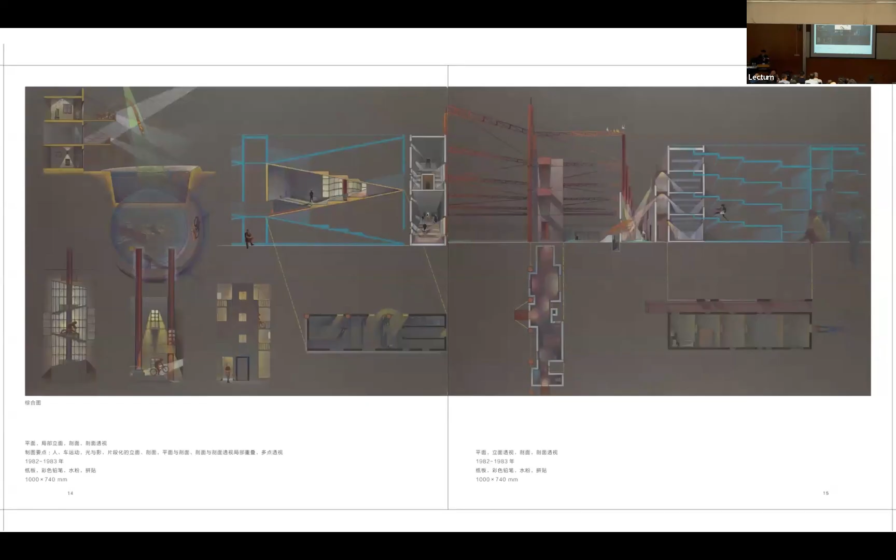As with a lot of projects we do as students—in my case, when I had this commission to renovate a passageway in an office building in Beijing, I thought of putting bicycle wheels onto the bookshelves, since that passageway was used for parking bicycles at the time.

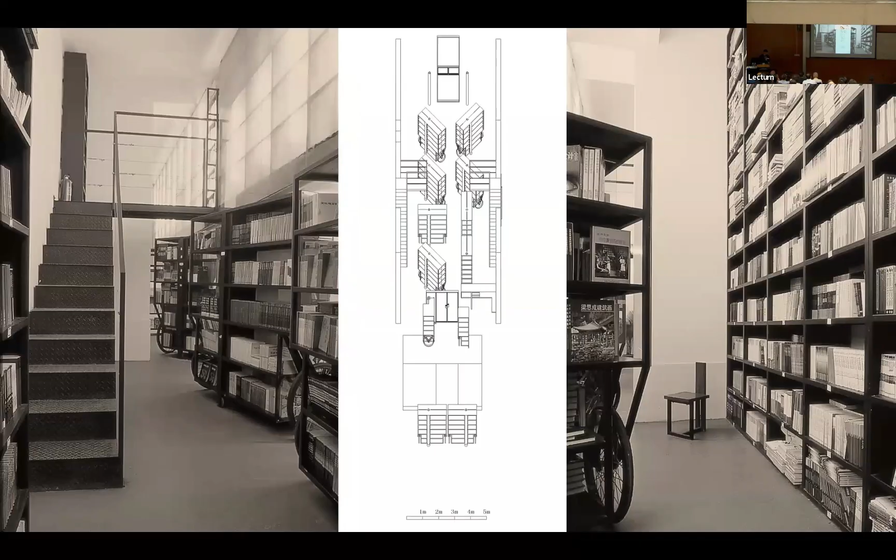So as you can see, all the book bikes—that was the name I gave to these wheeled bookshelves—started to have a certain kind of mobility. It doesn't go anywhere, of course, but it would turn, would revolve. I think what I learned at the time is that an idea can't just be something put into words, but should be something always present so that people would understand why you do certain things. Anyway, that was the first project.

However, with this concept of bicycle, there's already the spatial issue always present in any piece of architecture, and then construction and detail—although the bicycle wheels were bought off shelves, so we didn't have to design the detail much.

From there, I also explored another interest I had, because my background in architecture started with education in second-hand Beaux-Arts in Nanjing, so I carried quite a bit of DNA from classicism as a result, especially perspective.

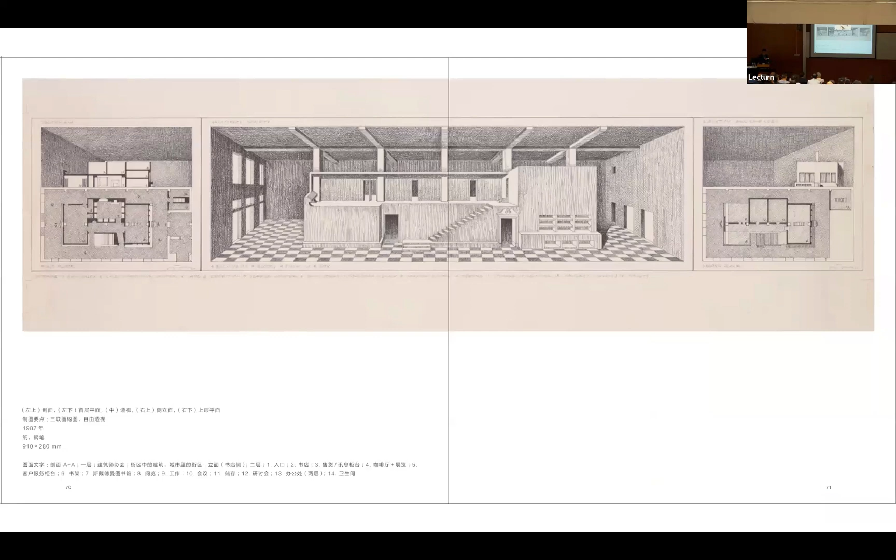So when I did an interior design, I just stretched that piece of furniture architecture into a different kind of furniture architecture. Even the drawing style, I was trying to imitate etching and so on.

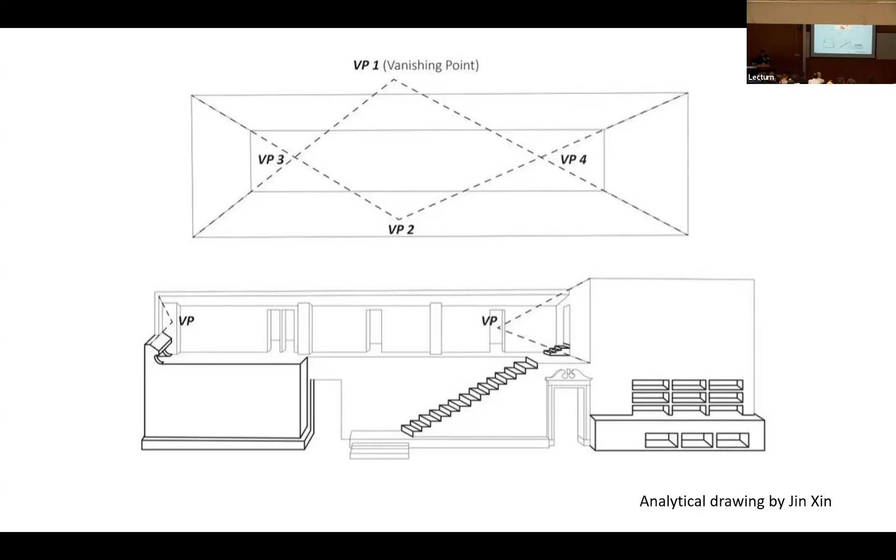Then someone else, a professor at Chongqing University, analyzed my drawing—it wasn't one point perspective after all. I wasn't thinking of just using that; that's not enough, but rather to take the perspective apart, so it becomes a number of different perspectival components put together, including one point perspective as well as axonometric fragments. I actually did more of that.

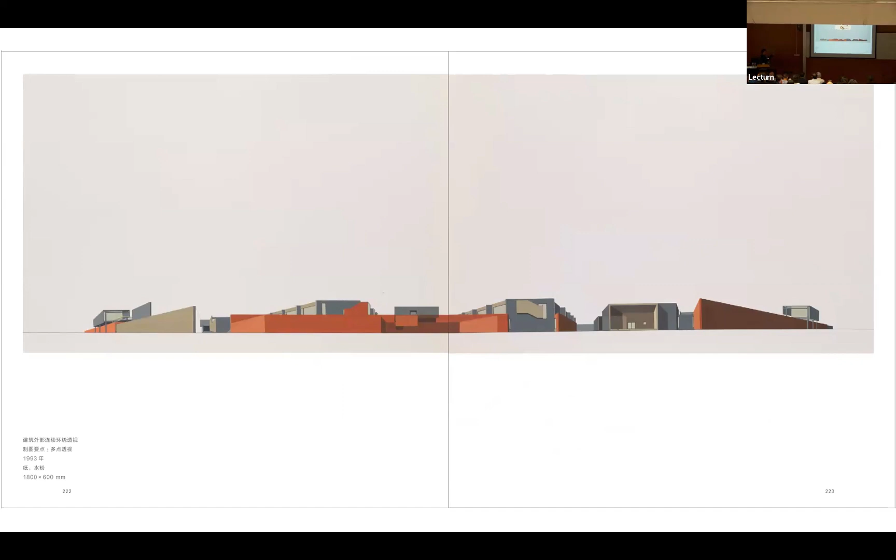In this case, it's only one point perspectives—plural, not singular. This is about going around a kindergarten we were designing, so you end up seeing from one side to the other side, the same building would appear twice.

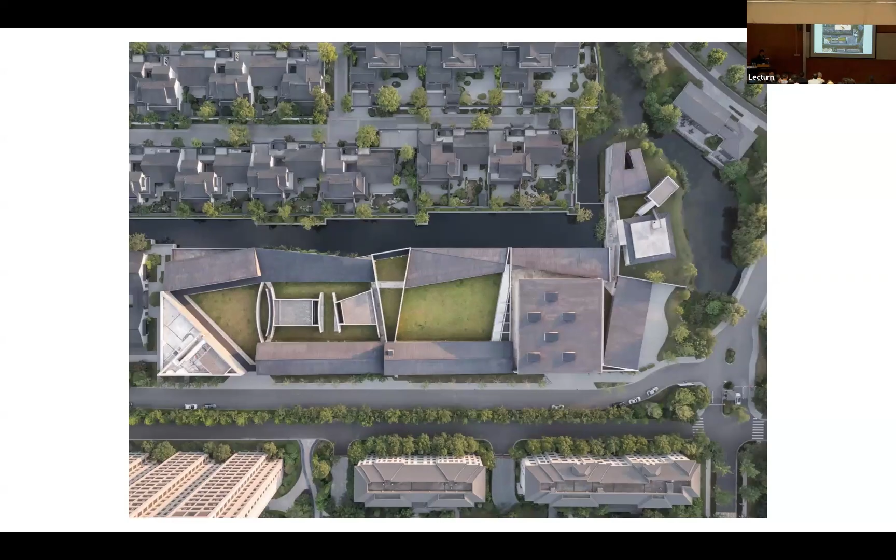In recent years, we had an opportunity to design an art museum for one of the very important abstract painters, Wu Dayu, so we put that early interest to the test. All these diagonal wedges are about playing with one point perspective—from one side, if a perspective is stretched and exaggerated, from the other side it's always shortened and weakened. It's sort of playing with that.

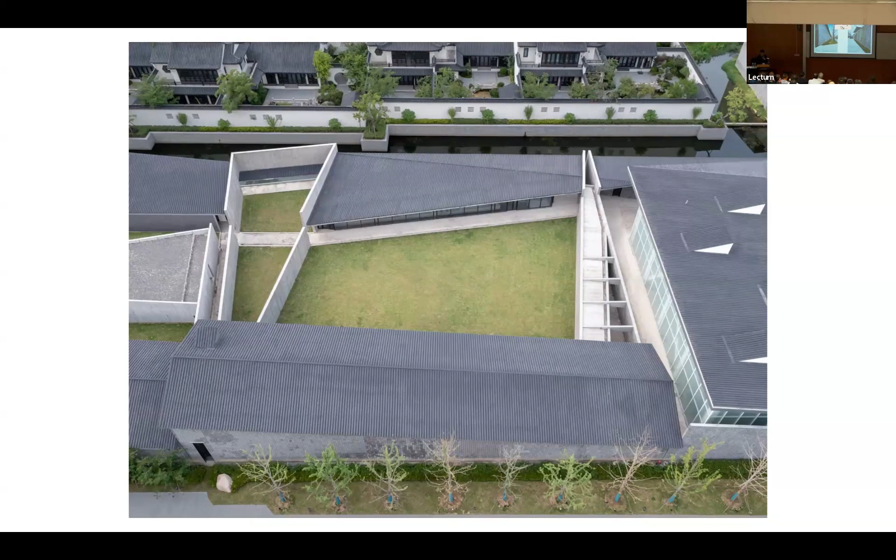When it's built, in some places it worked, but it's very difficult to photograph, so what I'm going to show you may not really give you the sense of it. That wall is tapered all the way, so that on one side it actually appears longer, and on the other side, of course, it's shorter—it's dramatic. If you go, you will see it, but in the picture they look rather similar.

The same thing applies with this space. Anyway, this is just another idea or interest I developed early on. So when I went back to China to practice, I don't think I had any sense of reality, but those semi, quasi—I just heard that word from Kenneth—quasi-academic ideas were with me, in my luggage, so to speak.

And then, of course, space. Even for me, although this is a much later project, it's still built like that. I always remember the nine square grid exercise—I wasn't a student at Cooper, but I just got a dose of John Hejduk regardless.

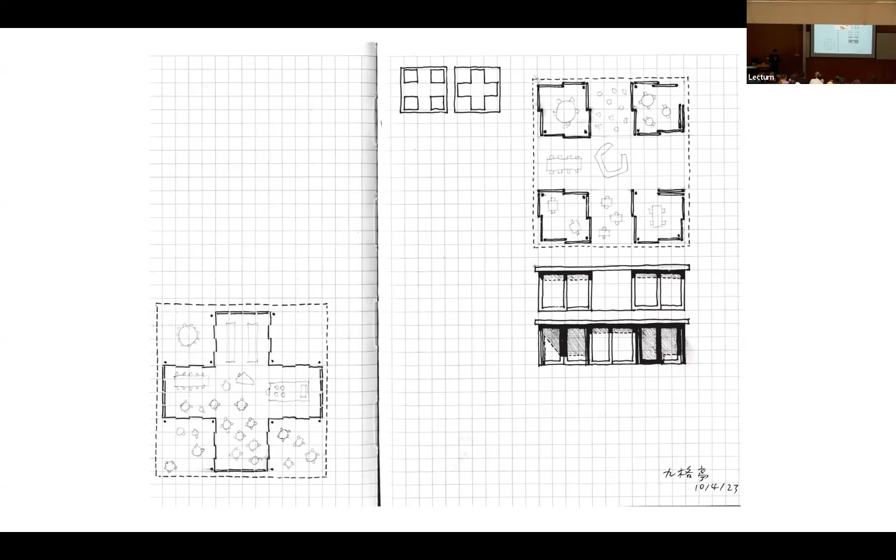So here, this is the interior, right? The cruciform part is interior, but here it becomes four smaller rooms at the corners. So it's a space with changing spaces. Structurally speaking, 12 columns support this big roof, and four corners are cantilevered. So it can go from one formation to another.

And it's on the lakeside in Wuxi. So we want to have the maximum transparency - skinny columns and very thin window frames, trying to get as much transparency as possible so you can see the cantilevered corner.

So this is a later project, also we have already accumulated more experience with structure and material and so on. And of course, the early projects would struggle with these very basic issues.

From that space, during that period, I was able to build something I drew about 30 years ago - I was a paper architect. At that time, I was teaching at Berkeley. I had no clients, no commission, no sites, nothing. But that doesn't forbid me from being in love with architecture. For about 8 years, I was very happy just drawing whatever was in my mind. Later on, I became very anxious about building, but that was a bit later.

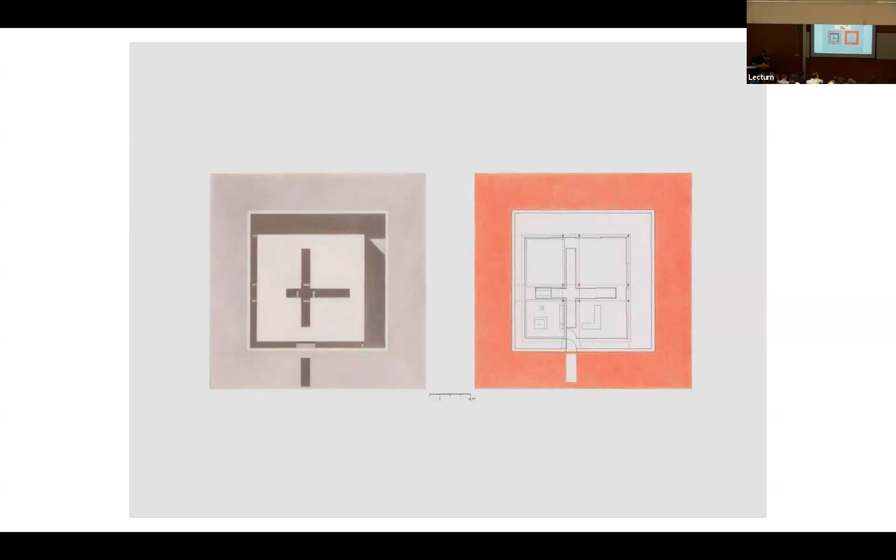So I was thinking of a glass house, one of my favorite subject matters. This is a house with four rooms - bedroom, living, dining, kitchen, and bath. It's a glass house with rooms, because usually a glass house does not have any rooms, which means I needed transparent walls. So this is a double layered glass wall so that I could achieve both a transparent glass house and rooms. That was the revised, improved plan due to more structural reasons.

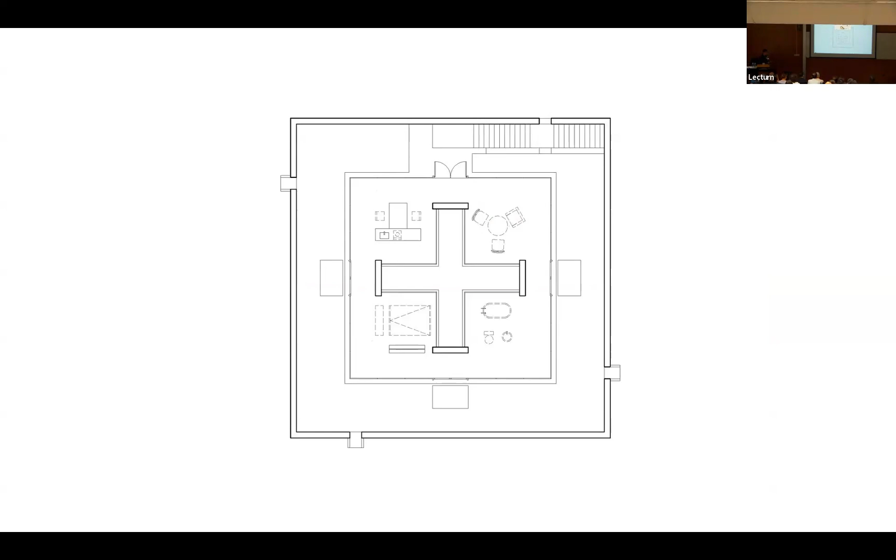So the four load-bearing walls support a cantilever on four sides - kind of a structure. That's the double layered glass wall, or light well. And then inside it's like this.

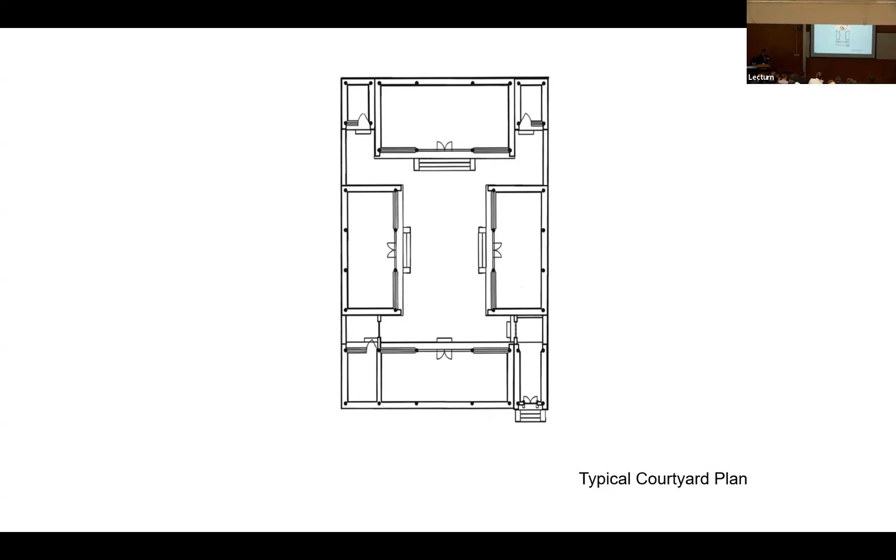So the courtyard project goes on, and this is a much more practical house on a very narrow, small lot in Beijing. We couldn't really make independent rooms on both wings, so we actually made the entire ring around the courtyard the living room. So that's the whole point.

We imagined the lifestyle in this case as how to live around the courtyard, following the sun - starting from that corner, breakfast corner, light is from the east, and then you move to noon time, following the sun to the afternoon, this becomes study. In the evening, you entertain friends.

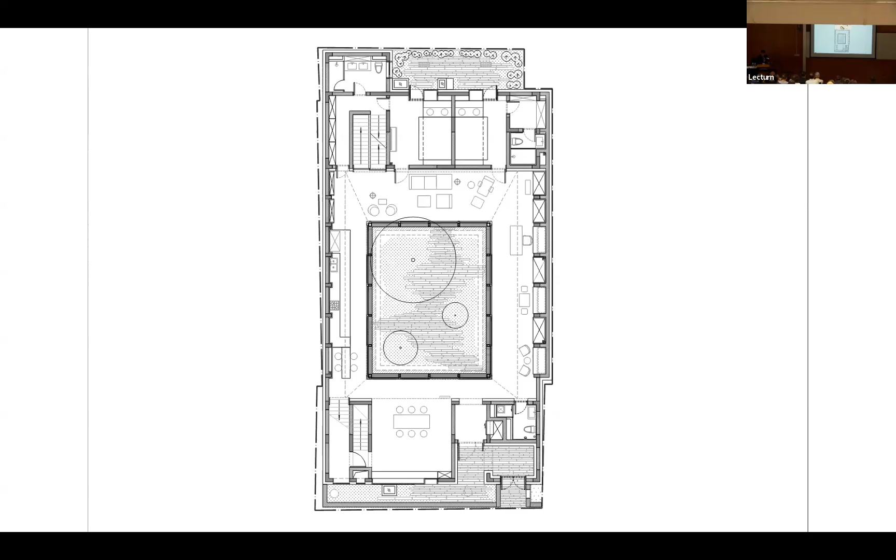It's another glass house, actually. It's not a building type that is totally Chinese. Probably already what is Chinese, what is not, becomes less important.

We had to do roofs like this because this is in the preservation zone of the city. But somehow you can see this glass idea from modern architecture in Europe - these two ideas could work together for me. That's what really excites me.

So you can see here, right, the transparency - although now it's not on the outside, but introverted, because outside in, the transparency is in the center, in the middle. This is the western side, and this is looking from the north side to the east wing.

For even bigger projects, we still keep that building, rather space topology. This is for a culture center for a big clothing company in Jiaxing. The client had an architect before us. The project was already up to the ground, and the foundation was all done.

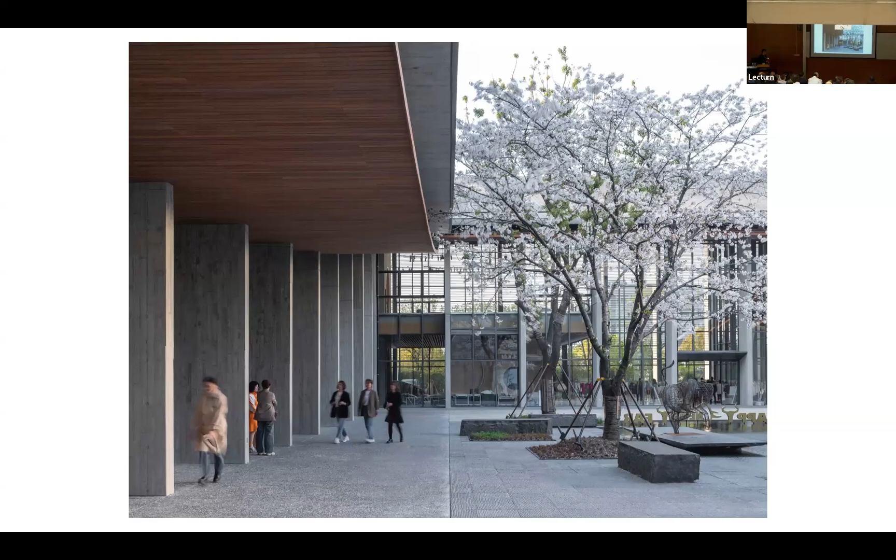Not that we're not interested in it - on one hand we do study and consider more the relationship between inside and outside, especially the so-called semi-indoor or semi-outdoor, because for our region, which is subtropical, that's something special. However, today with climate change, the subtropical zone is moving north, so more places could enjoy more outdoor living, although the tropical area for sure would be too hot for that. So here is another idea.

It's very much related to courtyard, but now it's more about the eaves. Chinese buildings, because of the huge roof - we say big roof, 大屋顶 - this gives the building very deep cantilevered eaves. However, for me, the way we build buildings, I think it's possible not to have the big roof, but keep the big eaves. So which means, of course, I'll show you.

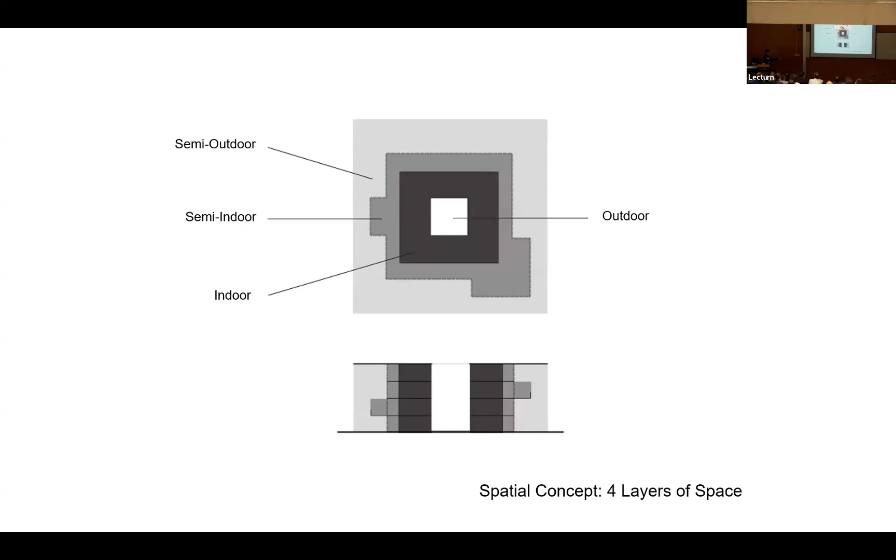Before we see, this is a diagram I drew. It's 4 layers of spaces: courtyard, air-conditioned space, and then 2 layers of outdoor spaces. This is for content, for activities. And then there's this layer which is just the big cantilever.

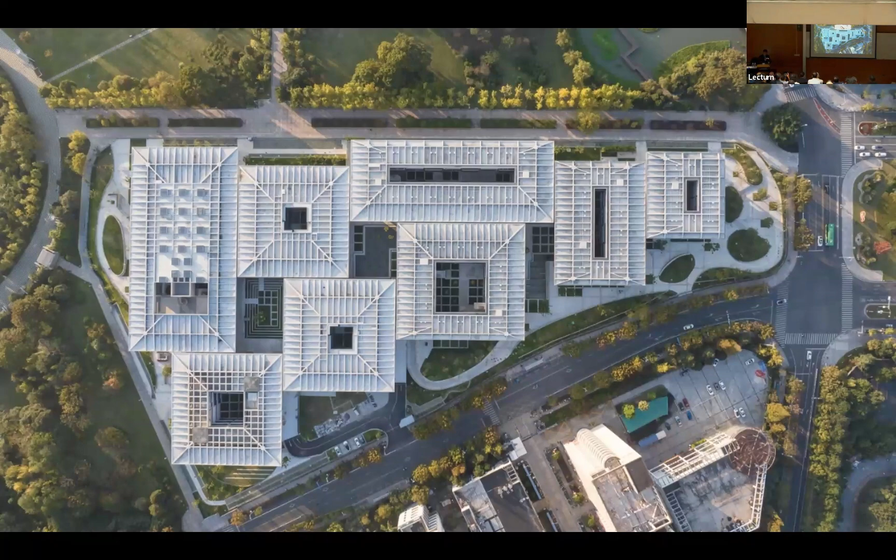So 8 buildings grouped together form an international exchange center, meaning students live there and have places to eat and so on, but also lecture halls and classrooms. It's a kind of mixed use, a miniature—probably not even so mini—a small campus within the campus. And here you see the big eaves.

And now, of course, there's no big pitched roof above. Between these big eaves there's a gap for the water and for the sun to come down. Still, we emphasize the outdoor quality.

And then 4 buildings would form a bigger courtyard in the semi-indoor layer and the interior. The smaller courtyards are in the dormitory quarters.

So the next one is material. Material is something very important for me because I've been practicing for a little more than 30 years. We have seen the changes in material. Now we have newer materials, but we also discover more old material being produced now, and it can be acquired at an affordable price. So we have a bigger palette of materials probably than ever before.

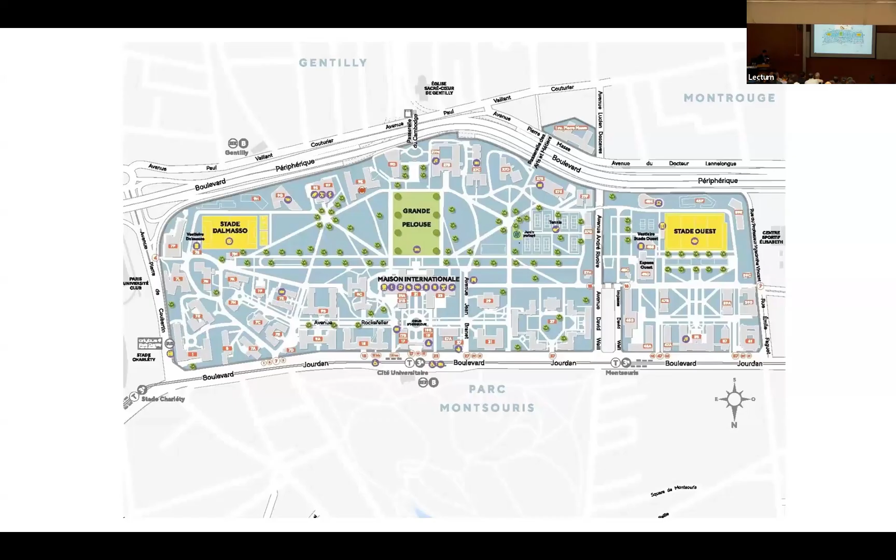The challenge was that our building should express a kind of cultural identity. According to the client, the way to do that is to have a big roof. But it turned out...

Around 2008-09, Paris developed a Grand Paris master plan, basically about making Paris into a more sustainable city, which also means for us to have a roof garden. That really saved us, because we didn't want to do the big roof—that's too easy, and I don't think it would have worked here anyway. So we could have a flat roof building but still needed to express the culture of China.

What we did is use bricks—the material and the workmanship—as a way to convey this identity. Eventually the bricks were actually bought in Germany. Germany is probably the most brick-focused country in Europe; they make more brick buildings and better bricks in general. Anyway, let me show some details.

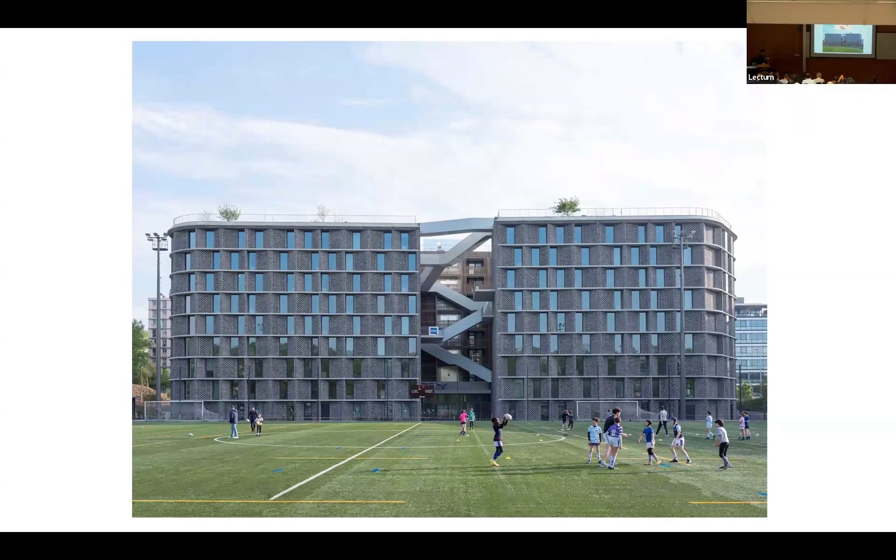We're also interested in this whole typology of the dormitory, or just the repeated single unit. Here we tried to develop variations of the rooms and express that on the exterior, so it's not as regimental as a typical dormitory, giving some liveliness to the design.

Back to the cultural identity—apparently we're suggesting that maybe the craftsman is the carrier of cultural identity, so we did different laying techniques and even cantilevered eaves with brick. The inside of the courtyard is wood. So back to Mu—earth and wood were the main materials for Chinese architecture. They can still be that today, but in very different ways.

Another brick building started from a little pavilion we did for the Shenzhen Biennale, using brick to make huge cantilevers. We did it by having rebars in the mortar joints and the bricks, so it's really a concrete and brick combination. In China there's a term for that, 砖混, but it's a different kind of 砖混 here.

Now we are in this urban village of Nantou in Shenzhen, and you see the fabric. Our intervention is this public building, a center for the community here in this village. We broke up the volumes so that the scale of the community center is similar to all the buildings around it—an old factory, built in the 90s, that was also transformed, in this case by MVRDV.

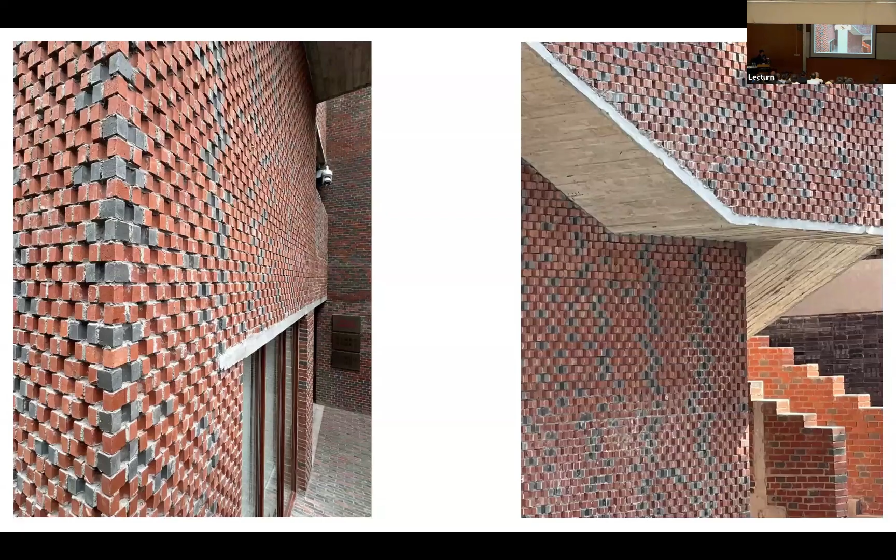You can see the corner. Yeah, they did a pretty sloppy job. And then, a bench in the semi-open corridor and so on.

So another one about material is where we started to expand this notion of material from the more architectural ones, even to some natural ones, and especially plants.

This is a 700-year-old village, and its architecture is in very good shape. When we first visited, there were only like 3 families remaining in this ghost village. So the whole idea is trying to give some energy and support so that the village life could possibly come back.

And then we were on the outside, giving a lily pond. We build a building in a pond, and then we think that it's time also to give the lily pond back. So we put it on the roof.

The building uses concrete and also tiles and bricks. So it becomes a mixture of materials. We have done quite a few single-material buildings, but in these cases, we started to make them mixed.

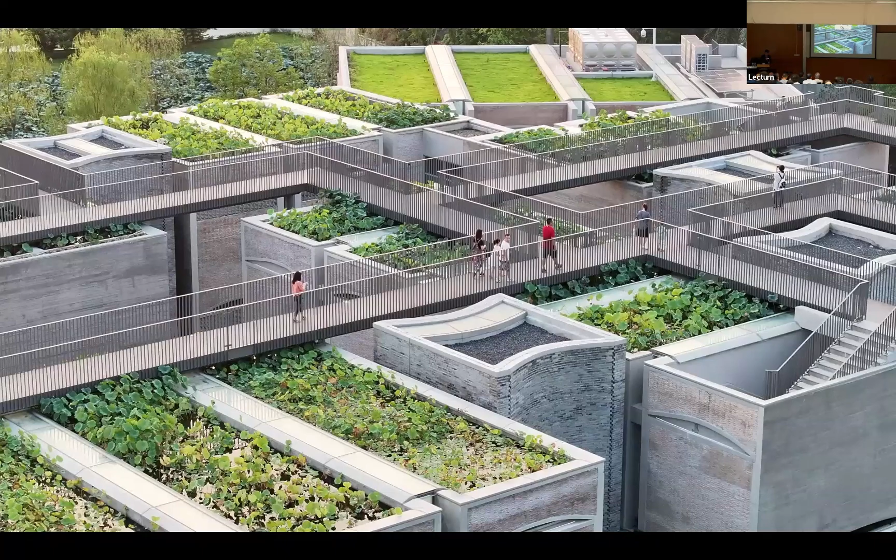More of that. And the other material I mentioned, in fact, of course, is water lily. So we put them back on the roof, so that would give us the reason for the visitors to go up there, not only to look at the water lilies on the rooftop, but also in the surroundings.

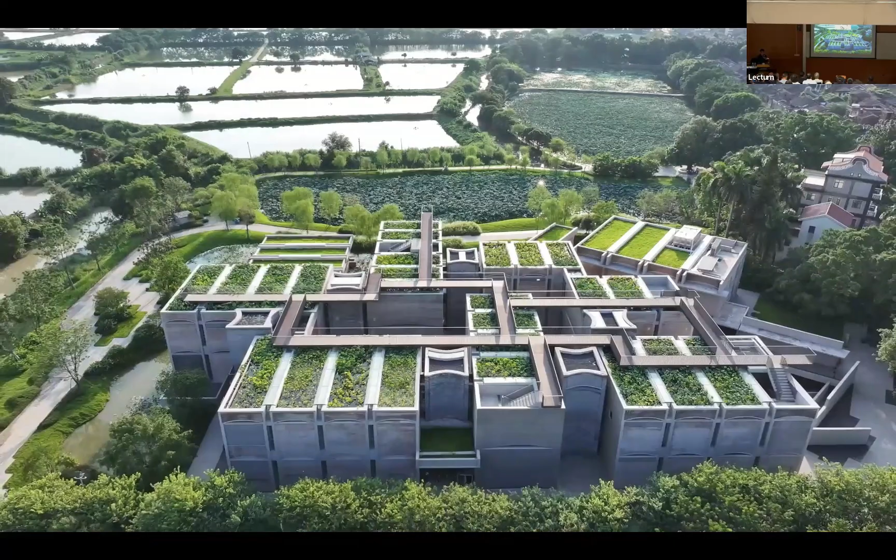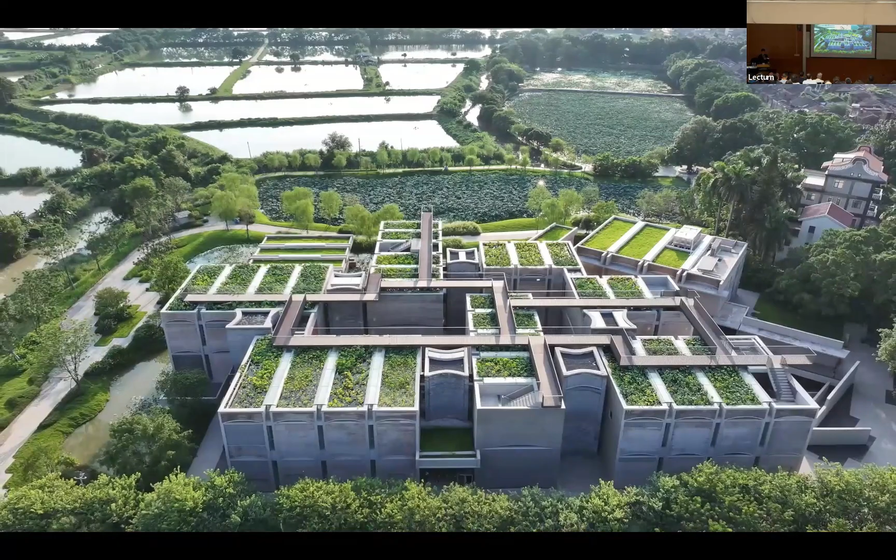This is one of the places not that far from Guangzhou, but actually when you go up there, you'll see taller buildings in the far distance, kind of very rather idyllic. So quite a beautiful place.

And then of course, we started to argue: is light also a material, and also vegetation, shadow?

And we had an exhibition in there on the work of Giacometti, and we drew on the wall the interior elevations of Giacometti's studio. Giacometti's studio has 24 square meters, so we gave it the exact dimension and height.

Anyway, and then on the roof, we put not the real sculpture, right? Too expensive, but some two-dimensional cutout of steel during the exhibition. So the last one is where we are.

So of course you can see a lot of things we started with, we didn't throw them away. Concept, I'm not sure, maybe it's still there, right? Replanting water lily in a way is a sort of a conceptual project. And there are other projects—it's always there: structure, space, material, and so on.